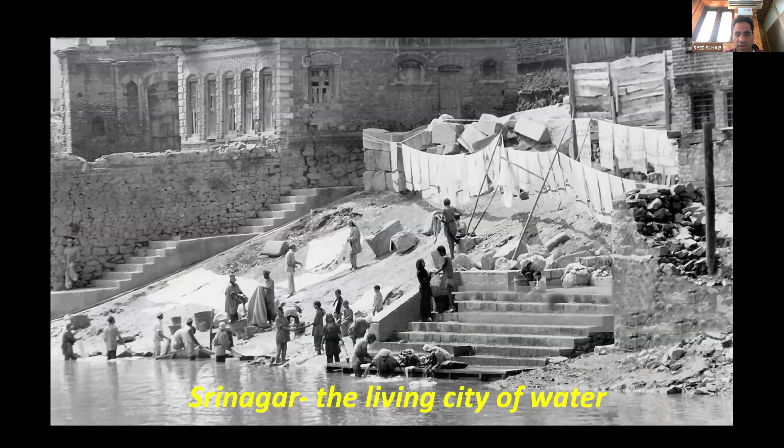It won't be incorrect if I say that Srinagar is the living city of waters. The entire city is inhabited around the river Jhelum, and we have multiple lakes and interconnections, which we locally call 'kuls', and our socio-cultural association with water and the river is immense.

Next please. So just an introduction about my city. The entire city is around the Jhelum river, which starts from the south of Kashmir and runs down towards the north, to Baramulla. We are talking about the center portion, which is the city of Srinagar, inhabited by more than 18.5 lakh people, majorly concentrated within the core part of the city.

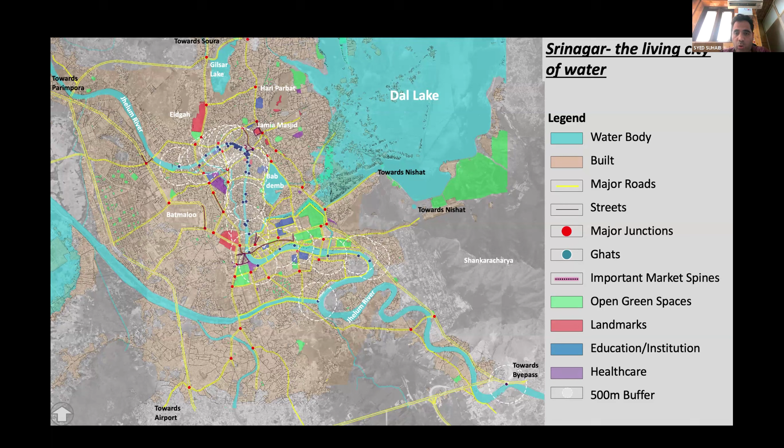So we basically identified our projects based on themes. Jhelum riverfront and waterfront is the major theme under which we did a number of interventions, and all those themes are interconnected. We are not talking about the projects in isolation - our entire projects form a network. We are looking for the entire area-based upliftment. Next please.

So this is the map which gives us the position of our famous Dal Lake, and the Jhelum riverfront. As you can see, along our Jhelum riverfront, you can see the network of those streets - basically the network which falls under the 500 meter radii. We have attempted to improve this. Next.

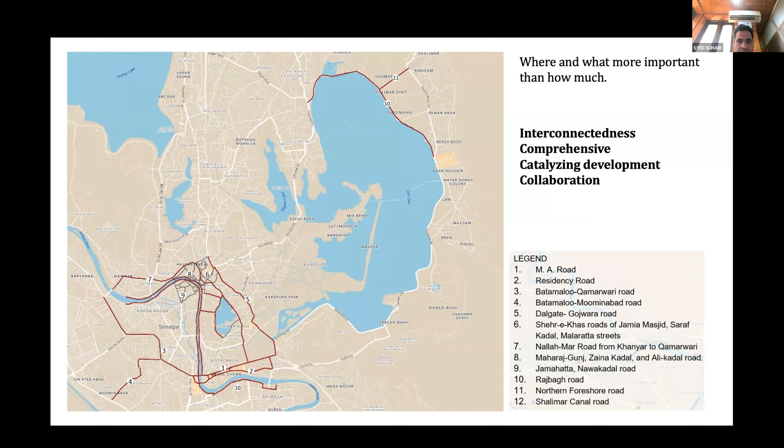So this is the Jhelum riverfront. Basically, we took improvement of Jhelum in two phases. The first phase forms the institutional area of Srinagar CBD, which has a length of almost 2.5 kilometers, wherein we have attempted to improve the accesses. As you can see, a number of streets, be it GPO, be it Poloview Street, have been improved based on universal access. Next please.

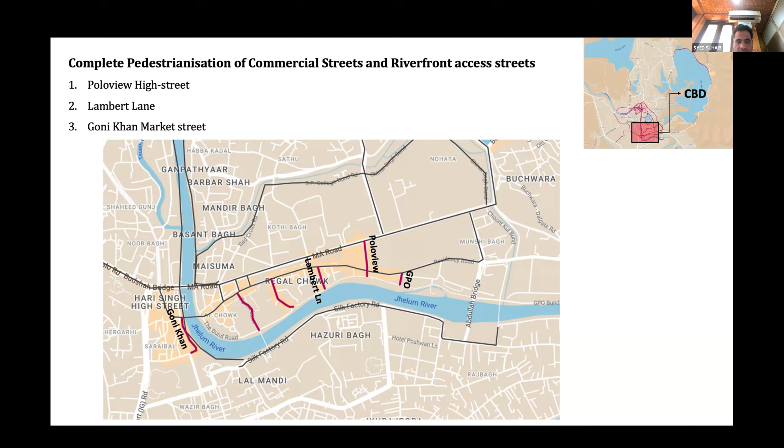So this is the entire map of Jhelum riverfront phase 1. Next.

So again, if we see the historic perspective of this Jhelum riverfront, this was always a public space. Later it was invaded by cars, but initially the entire Jhelum riverfront was the social and cultural space for inhabitants of Srinagar, where they performed cultural activities. Social gatherings used to happen along the Jhelum riverfront, and because mobility in Srinagar was water-based, the ghats along this riverfront were also the boarding and alighting points for that water-based mobility.

So we initially started identifying the issues. As I was talking earlier, the riverfront was invaded by cars. All these public spaces were encroached by cars, leaving no space for people to move. And then there were solid waste management issues on the riverfront.

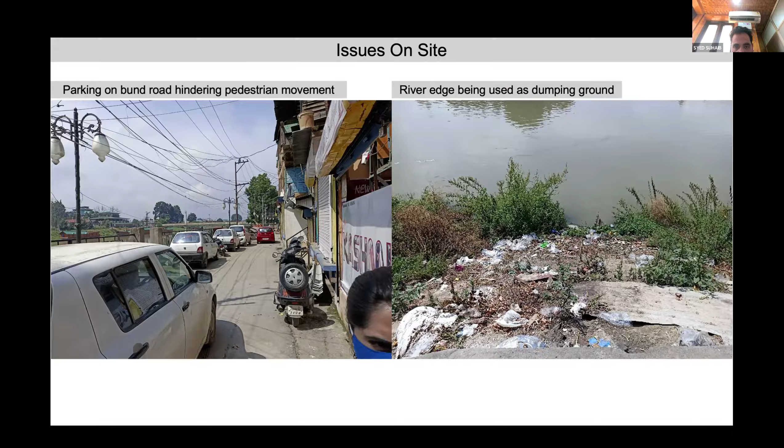So you see the space, it was inaccessible. Earlier interventions were majorly engineering interventions, which further led to the decay of the riverfront. They had attempted to make this a public space, but it later turned inaccessible for people.

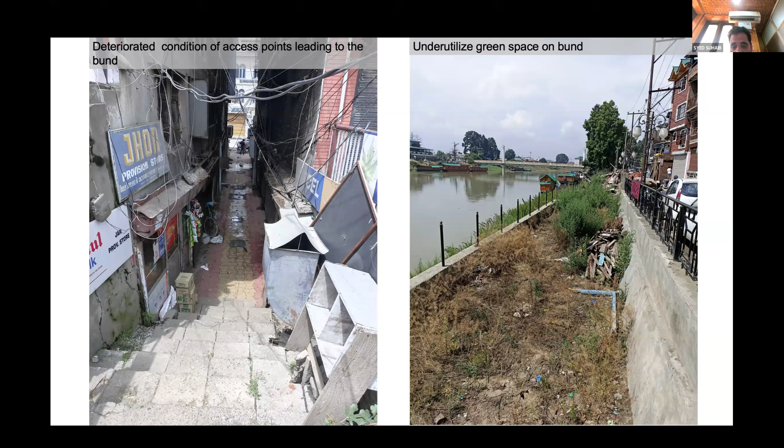Next, please. Again, the condition of the riverfront was dead and not maintained. The public spaces were again inaccessible. The historic ghats where activity used to happen were in shambles.

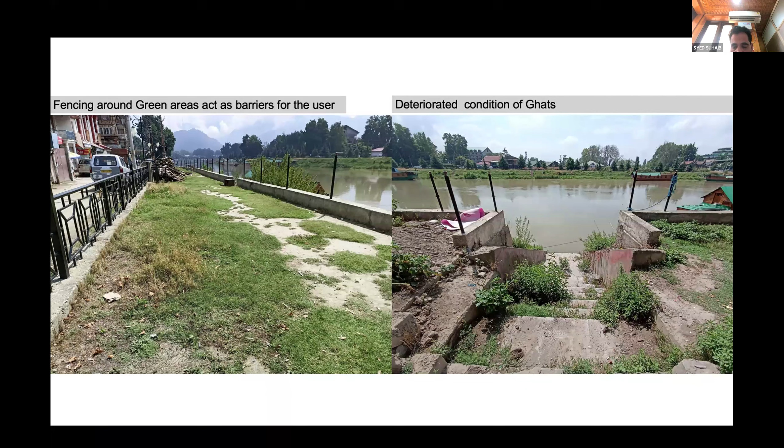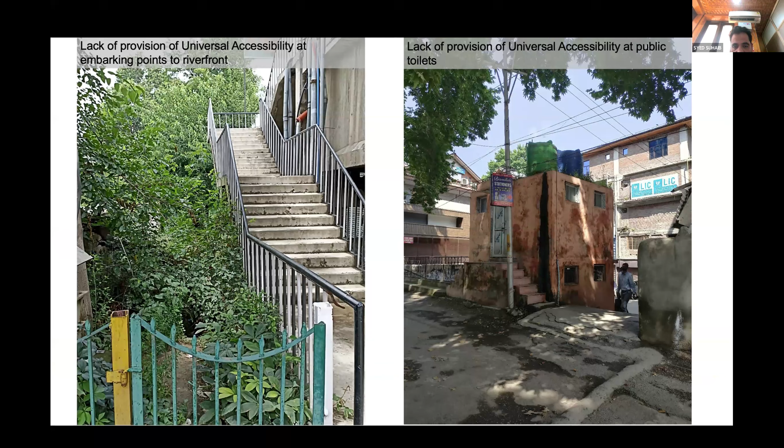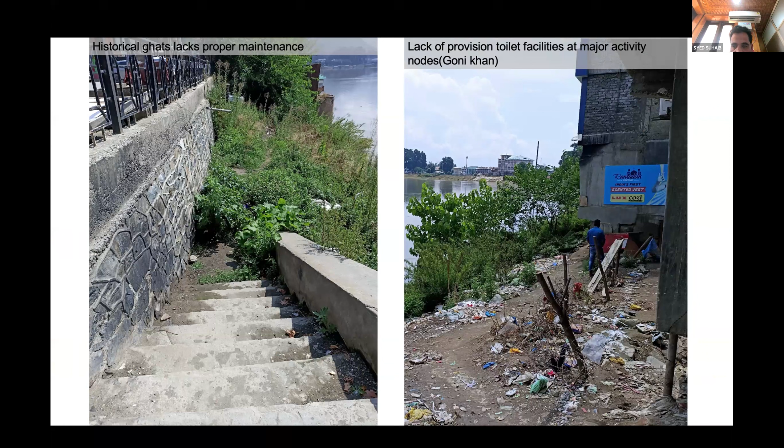Next. So these are some of the streets which are the major access corridors to the riverfront. The public utilities, be it public toilets and all, were again in shambles. The area which used to be the front yard of the city was turned into a backyard of Srinagar city. Next, please.

So, an idea about the surroundings, the site and its surroundings.

Basically, phase 1 of the Jhelum riverfront, which we are discussing, is majorly a commercial hub of the city, with a number of institutional pockets. If we compare this part of the Jhelum riverfront with the old part of the city, you would see that activity here is less as compared to the old part of the city. Next, please.

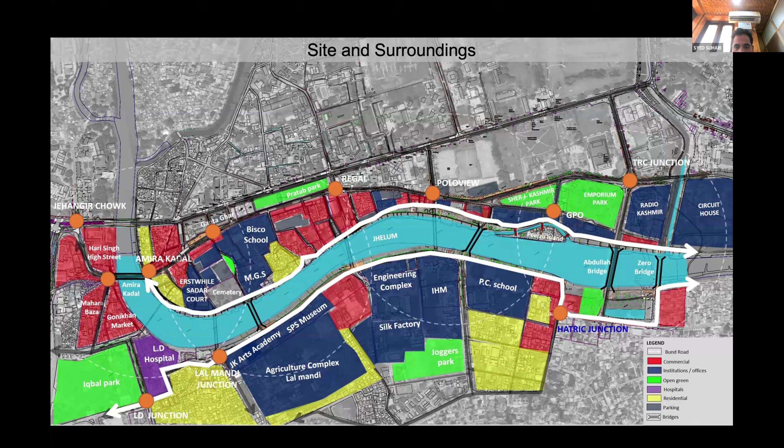So some major access corridors. Next, please. Can you move a slide back, please? Yes. So what we are trying to do is identify the existing access corridors, and we also propose new accesses. Basically, the desire lines, what we call them, we try to make them proper access corridors, so people feel easy coming to the riverfront.

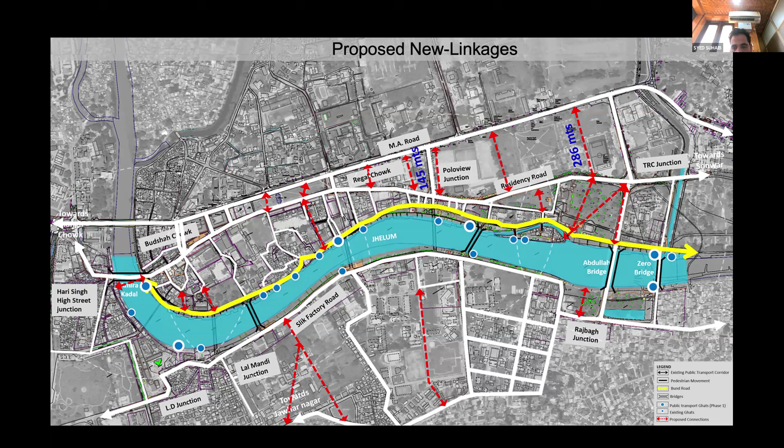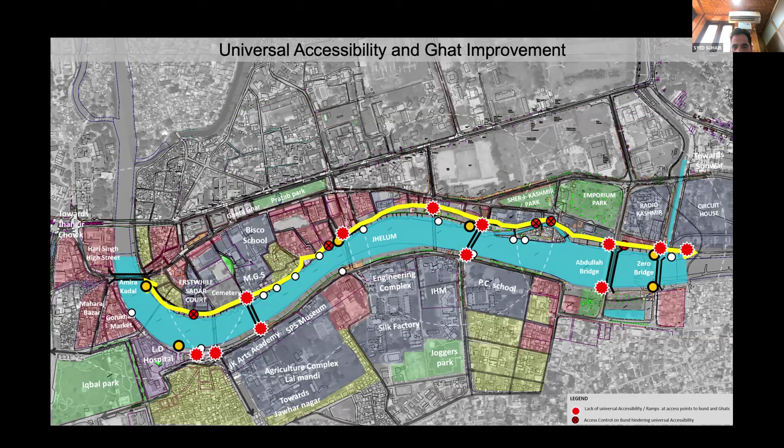So basically, all these desire lines were improved and developed into pedestrian connections. Next, please. So along all these ghats where universal accessibility was absent, we tried to introduce universal access along these ghats and access corridors.

There were activity nodes present along the right side of the Jhelum riverfront, but there was less activity along the left side, so we proposed some nodes which basically act as a magnet to invite people to come to the riverfront.

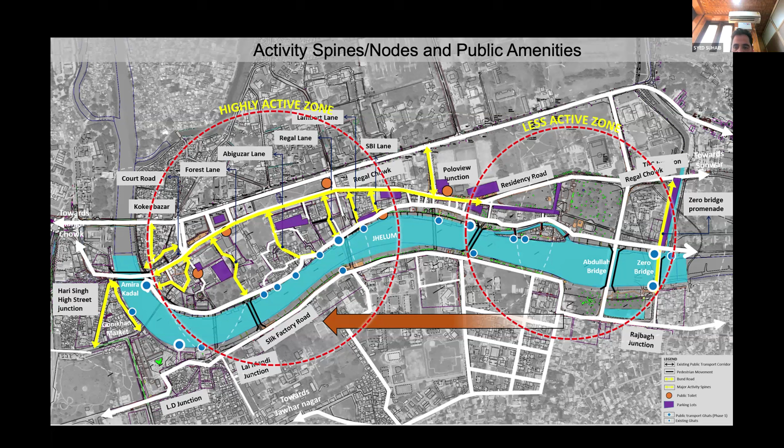So next, also getting basic knowledge from the best cases around the world. But when we were doing the riverfront, we tried to make it totally contextual. We didn't try to copy-paste interventions. Basically, whatever we did was entirely contextual, based on whatever was the need of the people. So we planned accordingly.

Next. So, trying to introduce elements which are basically local, we were not trying to put in elements foreign to this place. So we have all those chinars along the Jhelum riverfront.

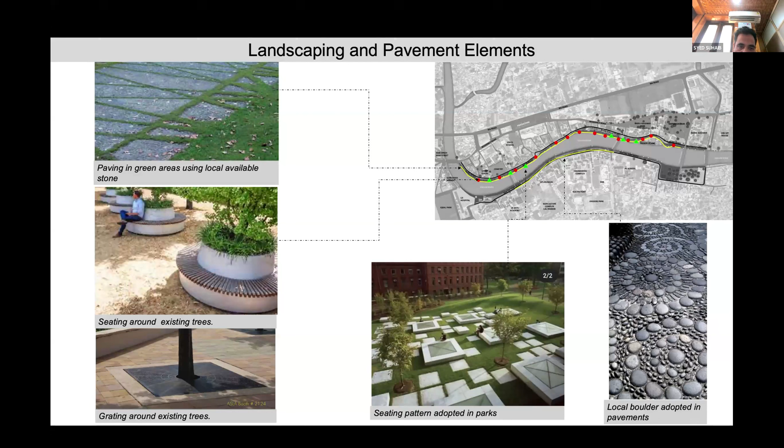Along those chinars, we are trying to make seaters using the local deodar wood, and using stone which is local to the place. So all the elements were local and nothing was foreign. Next.

As I was saying earlier, we had activity nodes along the Jhelum riverfront. Suppose we had the existing Srinagar club, but there was no activity happening there. We got in touch with the owner of the Srinagar club and got into discussions with them. We tried to put in an activity so that the Srinagar club becomes an active node of the Jhelum riverfront.

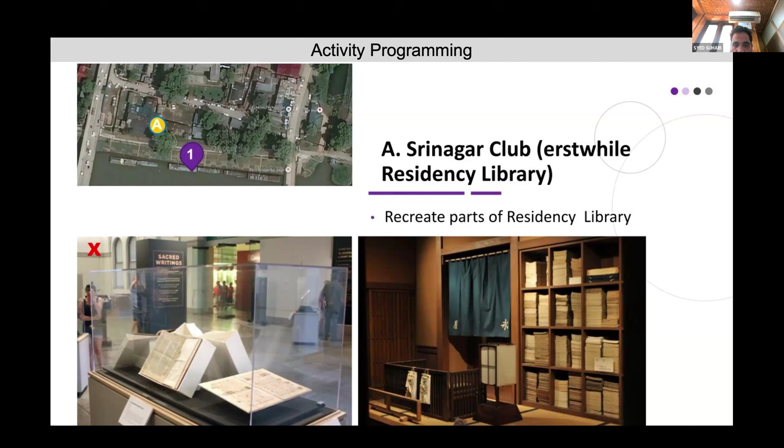Next, please. Next, please. Next.

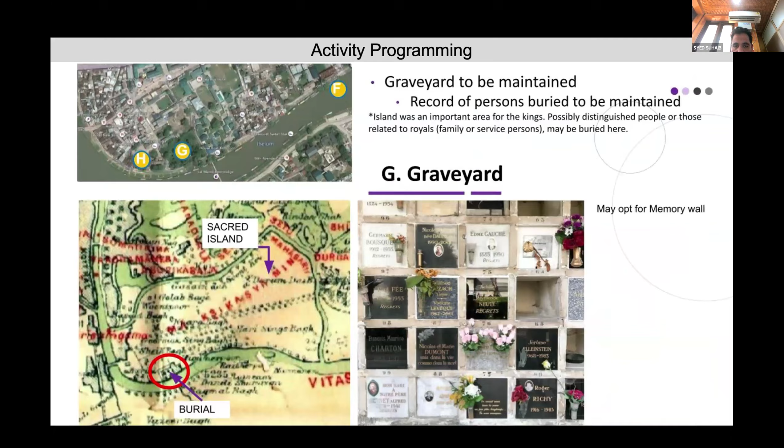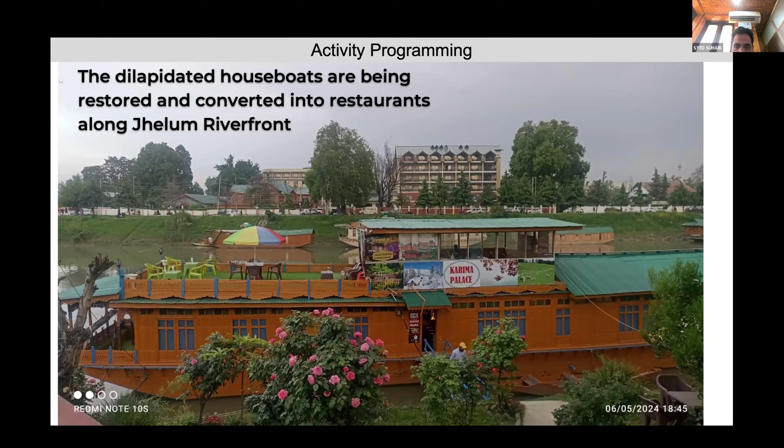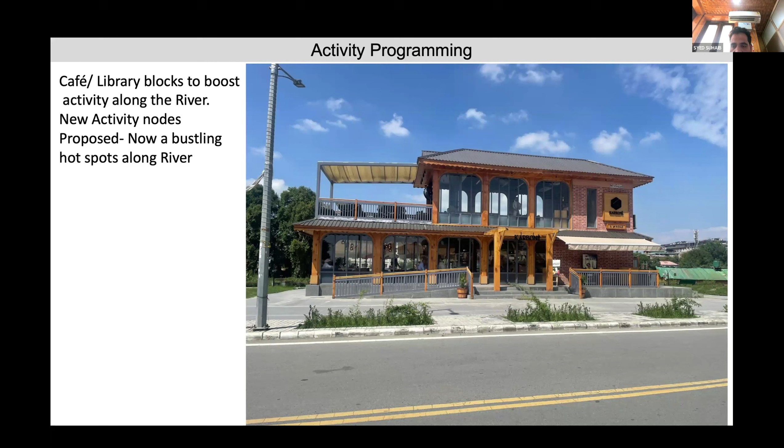Next, it's a restaurant, a thriving restaurant. Again, for improving activity, we have developed several cafes, restaurants, and kiosks on the riverfront. Only the construction part was done by Smart City. Now the refurbishment, interior makeover, and precinct level upgradation were done by the private party. We have given this on a lease for 5 years, wherein the private party manages and monitors this kiosk, and it acts as an important activity node on the Jhelum riverfront.

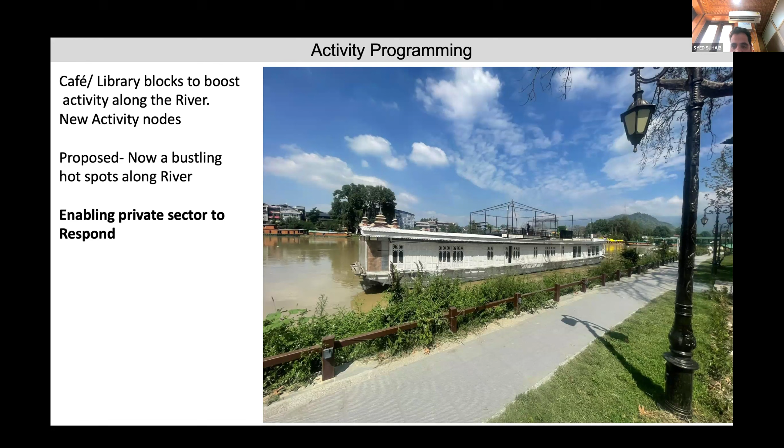Again, another case of a houseboat, initially in very bad condition, but when the Jhelum riverfront was improved, the access to it was improved. The owner of the houseboat responded to that improvement, and he upgraded his houseboat to act as a thriving restaurant along the riverfront. Next, please.

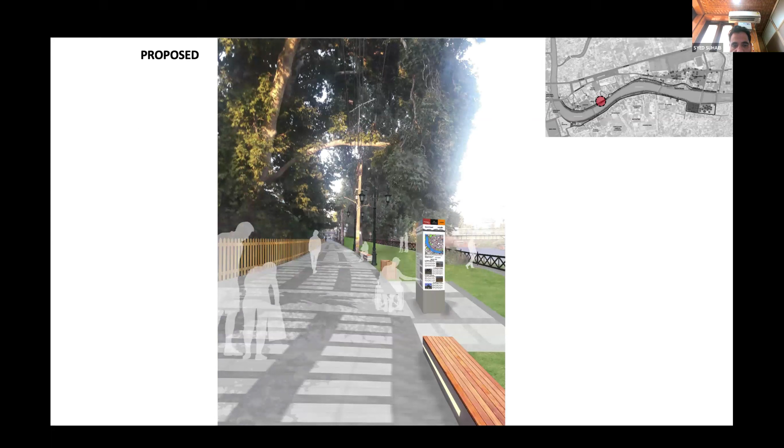So some of the pictures, I'll quickly go through. This is what was initially there, and what we propose. Basically, entire barrier-free space. The access corridors I was talking about, we tried to improve the access and enable universal access along all of them.

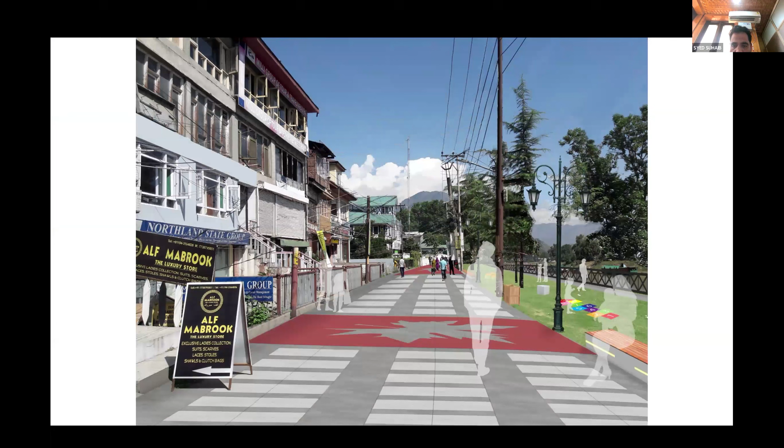So again, the area was barricaded with all those fences. Now it's an open space, a barrier-free space with local elements, like the paving we have done along the riverfront, which is local. We have incorporated local elements, be it flooring made in the shape of the chinar, and all those seaters made up of local wood.

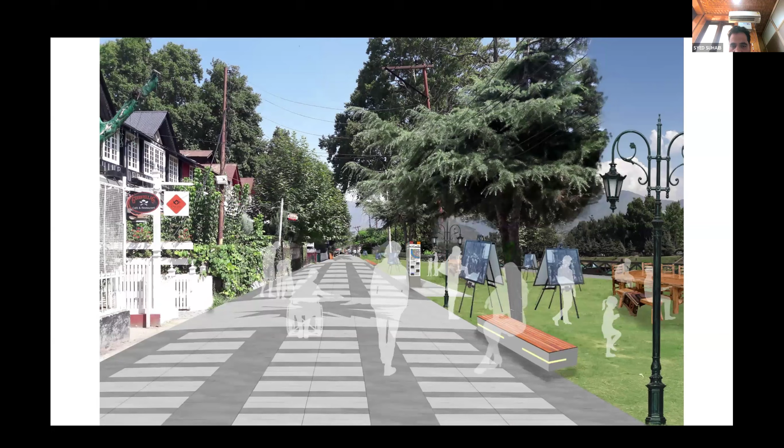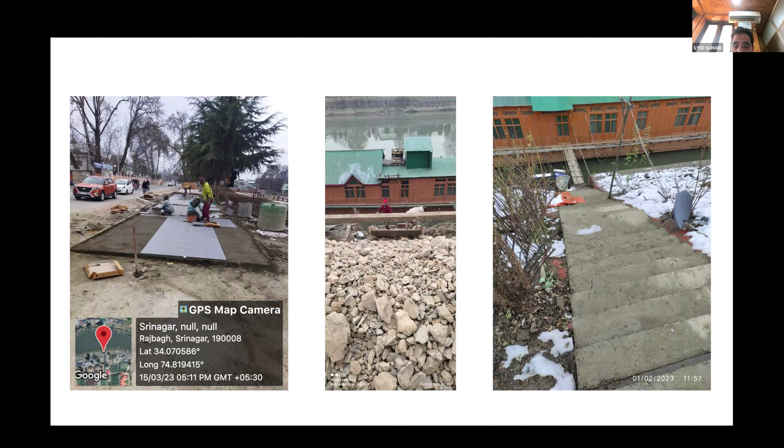This intervention in the city has also led to the capacity building of institutions, because initially this kind of work was not being done in the city. Now when the roads department develops a footpath, they are aware that they have to develop it based on standards, that the maximum height has to be 6 inches only, it cannot be more. So in a real sense, the capacity building of those agencies has also happened.

So these are basic improvements, nothing hardcore, no hardcore engineering, only improving access and making the space more attractive for people. That is what we have done. Now the entire space is barrier-free. Lesser space is given to vehicles, and more space is developed as a public realm for people.

Now this Jhelum riverfront is the bustling hotspot of Srinagar city. Initially, when a visitor came to Srinagar, he would nearly always go to the Dal Lake, because there were no other options for visitors. Now this Jhelum riverfront has become the new address for visitors as well.

All those landscaping elements along the riverfront, and all those trees, which were already present on the riverfront, basically age-old deodar trees, and we also have chinars, have been incorporated as part of the entire improvement. So urban design planning was done in a manner that those chinar trees become interesting nodes of the city, wherein people can come and relax.

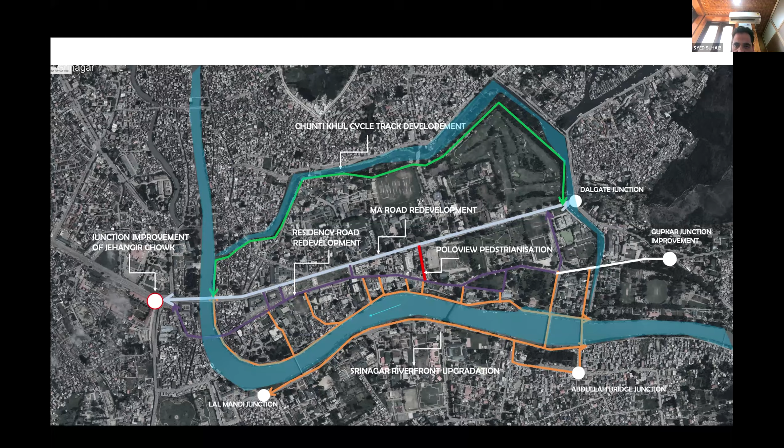This is a street which is a direct connection to the riverfront. It was majorly occupied by cars, though it was a very important market of the city. This was perhaps our first intervention - we improved this market and upgraded it as a complete pedestrian connection to the riverfront. When doing it, we also made a parallel road so that vehicular connectivity was maintained.

This is how Polo View looks now - these are all the access streets to the Jhelum riverfront.

This is one more street called Maulana Azad Road, which leads to the Jhelum riverfront forming the old part of the city. Here the context was different - this was a very compact area with heritage buildings. We didn't have the Jhelum riverfront as a continuous promenade, but instead had heritage ghats lined up along it. Those ghats were the historical, cultural, social, and economic nodes of the city.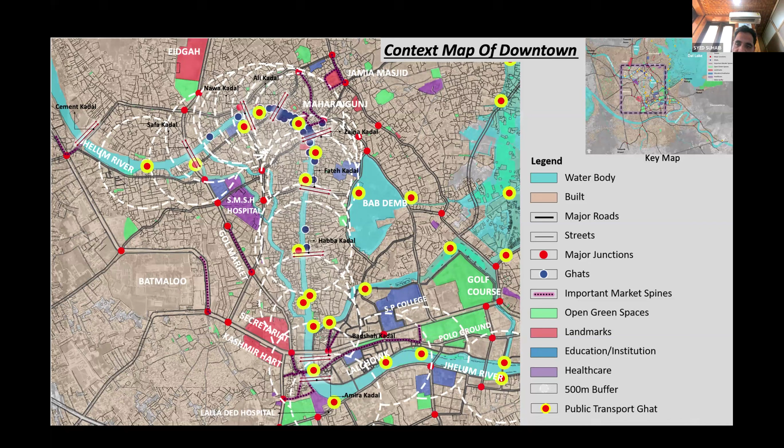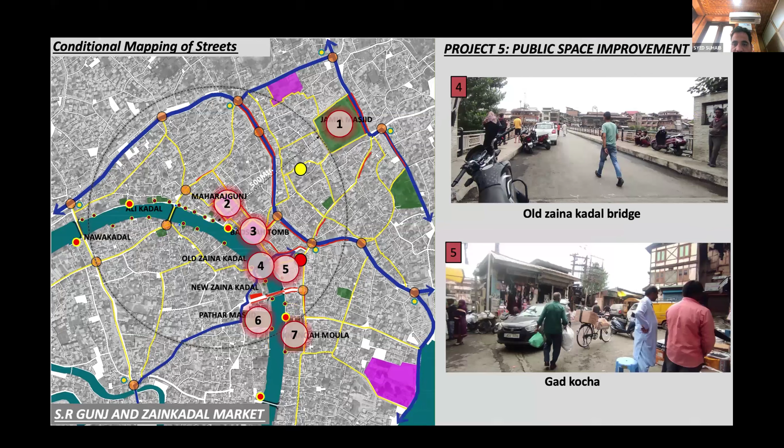These are all the streets we have upgraded along the Shahr Khas of the city - upgradation of all those nodes and heritage sites.

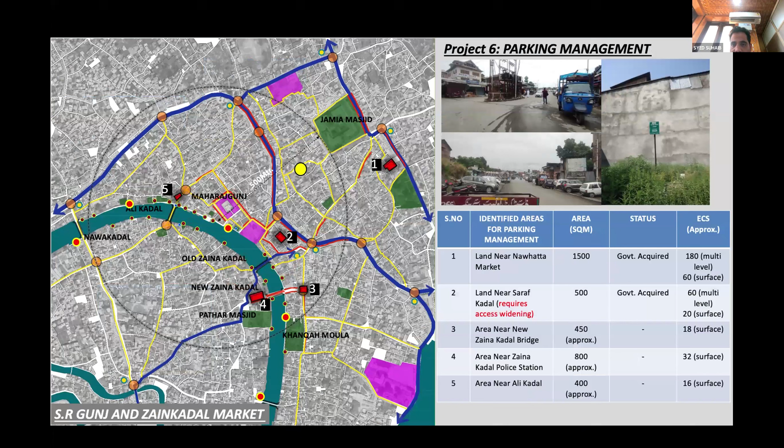These are all the public spaces which were connected to the ghats.

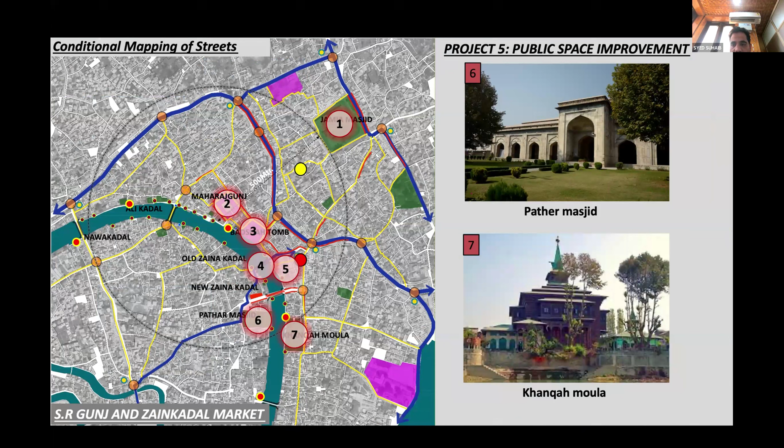The improvement of these public spaces has been done. All these ghats have been upgraded so that social and cultural activity happens there, and also to support our water transport, boarding and landing points. As you can see, all those barrier-free ramps have been constructed.

This is a very historic ghat near our Khanqah Moula shrine. This ghat was restored - we did conservation work on it. We have not attempted to disturb the original character. What was there, we upgraded it - we did not do hardcore engineering, we restored things as they were.

All these ghats - so I was discussing the street upgradation. These are the streets which go to the Jhelum Riverfront. We have done their complete comprehensive upgradation.

The major learning we have is that planning is the key. When doing such projects, we should emphasize planning first, not have a knee-jerk reaction towards engineering, not directly start with engineering. We should give time to the planning.

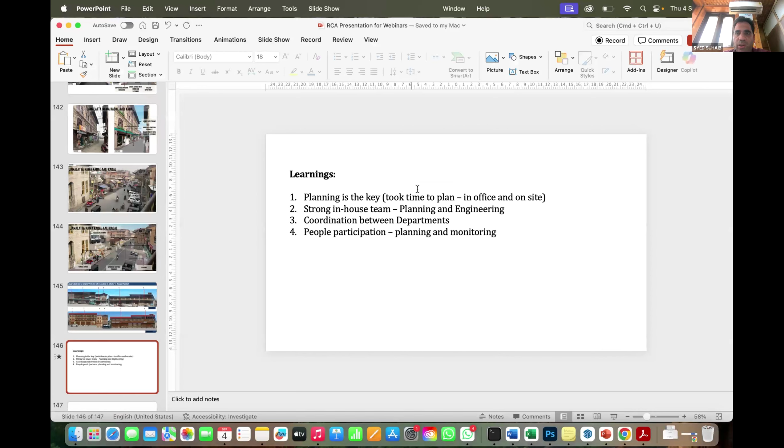Initially when we were doing the planning, public participation was core of it. All the suggestions we developed into proposals came from people. If we tried to introduce any foreign element into the riverfront, it was not recommended by citizens. People wanted us to focus on preserving the historicity of Srinagar, not introducing any foreign elements.

That is actually a great thing, because foreign elements change the character of the city, which obviously is not preferred generally.

The next question is, how was people's participation ensured? Were there any on-ground surveys done during the proposal preparation stage, or was the public involved later on? I would say public was involved from the very beginning.

When Srinagar Smart City SPV was started, we did a citizen feedback survey, which gave suggestions on which areas were must-work areas. A lot of citizens also suggested we should have a robust drainage system for Srinagar city, and that shady parts of the city should be revitalized into vibrant hotspots. So initially a detailed citizen feedback survey was done, and during planning we displayed our designs along the riverfront on big hoardings, which also brought many suggestions from people.